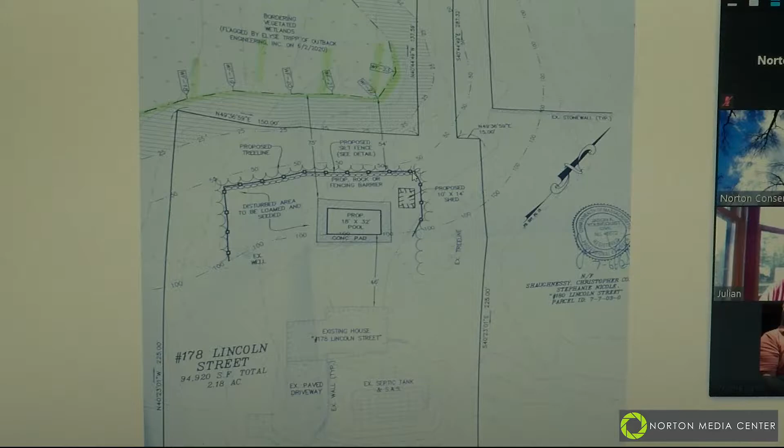A silt fence is proposed for erosion control during construction. And last but not least, there was one tree that the applicants had noted, and I'm sure they can add some more detail to that as well, that is outside of the scope of the tree line adjustment, but there's just some nervousness around it about the tree. It's not doing so well, so they're getting the approval from the commission as well to get rid of that one tree, but that can be worked with on the agent as well to help specify. If the Tarsas would like to add anything else, any notes, they're more than welcome to.

Yeah, so there's a tree just about to the northeast of where the current shed location is, that kind of leans into the loaming area, which would be potentially over the pool. Just like to kind of remove that just for future safety of the structure and of the pool.

All right, it looks like this is an already cleared area, is that correct? No, currently right now everything beyond the 100-foot line is all trees, shrubs, poison ivy. Fairly good sized trees? It varies from saplings to, you know, good size - there's one good sized oak tree that sits right on the 100-foot line. Okay, any questions from members of the commission?

I just had one question. So you're showing the pool about 46 feet from the house. I was just wondering why it was so far back, and wasn't any attempt made to take it out of the buffer.

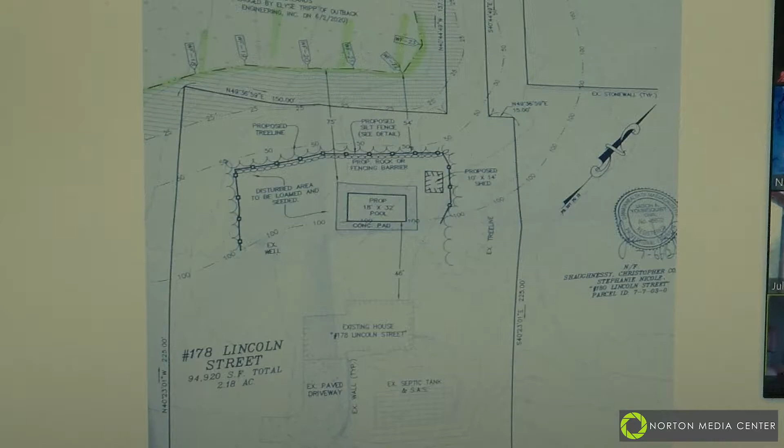I don't know if there are any members of the public that want to comment on this, unless there are other questions from the commission. I don't hear or see anybody unmuting. They have the capacity to unmute, is that correct, Jennifer? I think they've been unmuting themselves, so I think they can do that, yes.

Well, if there are no further questions, who is that? Oh, I'm unmuted. You're okay, Dan. Okay, but no question, Dan? No, the no-disturbance zone markers on trees, that would be my only question.

And it seems like that's been taken care of. I believe they're aware of that, and it shows a visual barrier on the plan. Okay, yep.

Any further questions? No, not for me. So it looks like pretty much all the information necessary is in, and we can consider a close, but I believe this is kind of provisional in that any questions can still come forth at the next meeting because of the difficult remote nature of this hearing.

Is that a fair statement, Jennifer? In the past, for most projects, you've continued for two weeks just to make sure someone from the public, if they had questions, would still be able to get those answered if they weren't able to access the Zoom meeting for some reason.

Whoa, hold it, this might work. Yes, I see a plan. All right, good.

At the last meeting, you were looking for a plan with grades on it. There was a plan from file 250719 where they have grades on the plan. I highlighted the 100-year floodplain so that you can see it. The old flagpole area right here was higher than the floodplain. Mr. Demmer's proposal is to remove the flagpole and the grading and install the fire pit, so it would still be outside of the floodplain.

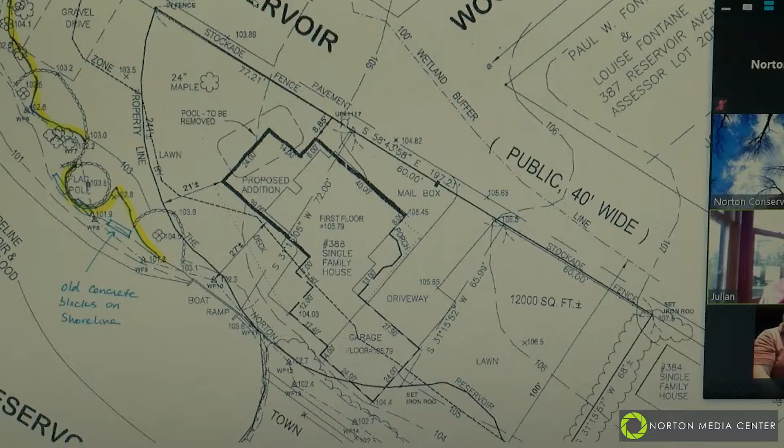Okay, I think that's all we wanted to know. Correct. All right, so do we need to continue in case there are additional questions, and then close it out on the next meeting? For this one, I don't think so, because you've already had 2 meetings on it, and we don't have any abutters or anybody who's called or asked any questions on it.

All right, so are there any questions from members of the commission? Nope. And any questions from members of the audience? No. I think Rick was going to say something, but it looks like we're about to approve it. Okay, I have nothing to say. All right, well, I think at this point we can consider a motion to close, and then we'll do a roll call vote. I'll make that motion to close the file for DET 1096.

Motion made by Lisa and seconded by Dan Pearson. So we'll do a roll call vote. Gene? Aye. Dan Doyle? Aye. Lisa? Aye. Dan Pearson? Aye. And I will throw in an aye as well. So motion carries.

So this is a request for determination, so it would just be issued. Is that correct, or are there some conditions? You need to make a vote that it's a negative-3. Ah yes, we're back in our regular meeting. So anybody want to offer a motion to make a negative-3? I'll make that motion.

Just 2 seconds. So we're again not seeing a plan. I was just using my arrow to describe all of the things that Craig... Yeah, well, it's not showing. We'll give you a little signal, Jennifer, so we don't interrupt. All right, now good now.

Okay, so this is the proposed design. The other portion of the resource area is the floodplain that is running along the bank of the reservoir.

So there's an existing single-family house with an existing detached garage, both of which are in very rough shape. We sought and have permission from the Zoning Board of Appeals to remove the existing buildings. We also plan to remove the existing pavement, which is close to the easterly property line, which would be within the 25-foot wetlands buffer area.

And this is what we're proposing to build in its place, the single-family house with an attached garage and the paved driveway in the front yard.

The existing yard right now has a chain link fence that was put in place whenever, 20, 30 years ago. It is inside the 25-foot buffer zone of the wetlands.

What we're proposing is the area that I have, and the rest of the property, I should say, is existing lawn with mature trees. Some of those trees will be very close to the existing and proposed building, which will come down, but the ones at the existing chain link fence, the large maple and another two large maple trees in the back, are slated to remain in place.

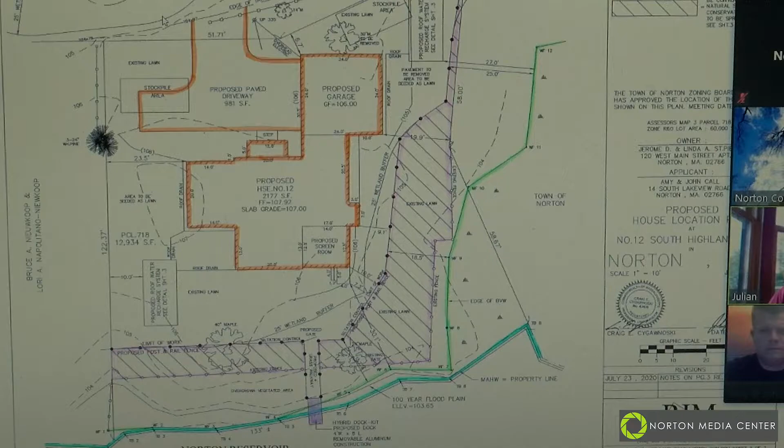Okay, thank you. Any further questions from members of the commission? Any questions from members of the audience? If not, this is something we can continue. Potentially all the information is here and we can consider an order of conditions next time, but it will offer the opportunity for additional input.

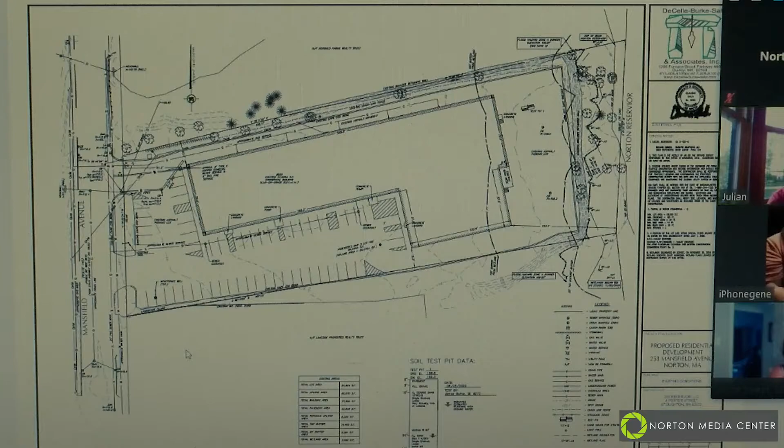So we had Ecotec come out and flag the wetlands along the Norton Reservoir to the east. You have BVW, you certainly have 100-year floodplain as well, as generated by the Norton Reservoir elevation, and that's shown on the plan. We generated the plan by field survey, instrument survey from our office, stamped by also one of the owners of the company.

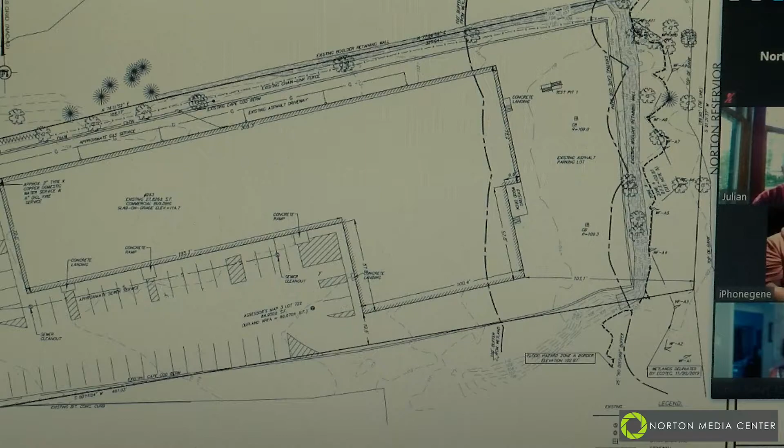Majority of the site is impervious. You've got probably 10,000 square feet of impervious in the 100-foot buffer. What we're proposing to do is revamp this whole development and redo the entire stormwater and actually meet all the standards of the stormwater management standards, as well as we're striving to work within that 25-foot no-disturb as well. As you can see, some of it's already paved and disturbed in the back there.

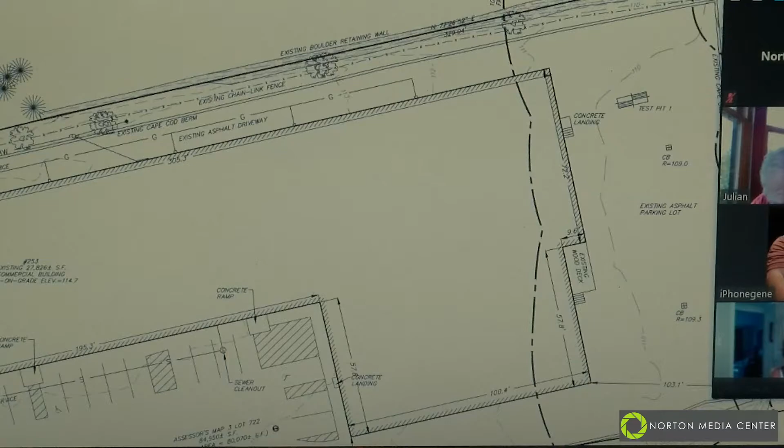You have a heavy stone retaining wall that supports the parking lot in the back, and the drainage in the back there is dated. I'm not going to say it doesn't work, but it's an old system - maintained, yeah, I would say that's a good word for it. But what this site needs is an assist in getting it back up to current standards, and that's what we're looking to do.

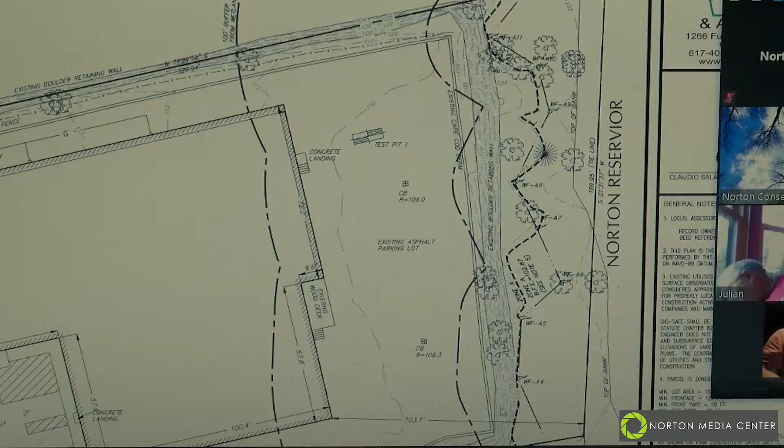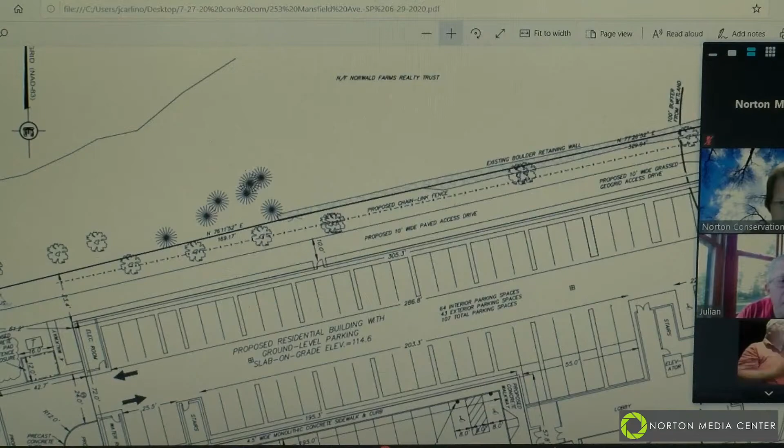If we can go maybe to the 2 sheets down - sheet 4? Yep. So what we're proposing is really to keep them within the building footprint. The original proposal is to use the existing building footprint and put, I think there's 74 spaces underground, might be 64 in the garage - yeah, 64 interior.

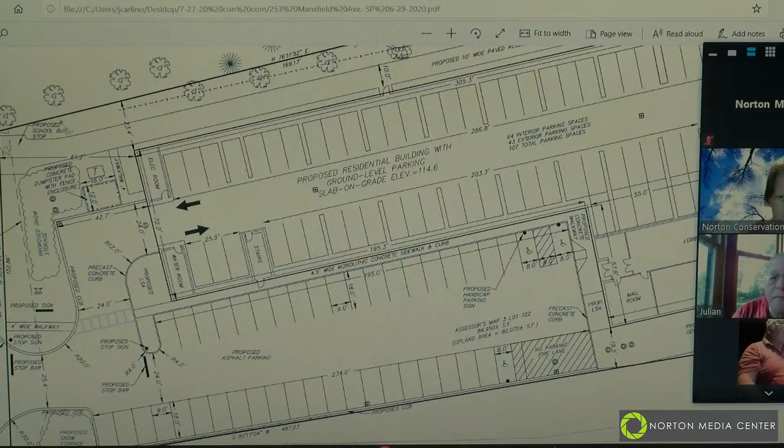But like I say, as far as the conservation issues go, we're taking out that entire parking lot and putting in kind of a passive recreation area, lawn, as well as a recharge system for the roof. And we'll be providing surface runoff drainage for the parking lot to the south of the building, that'll be collected through a water quality unit and discharged to Norton Reservoir. The suspended solids will be certainly meeting the 80%.

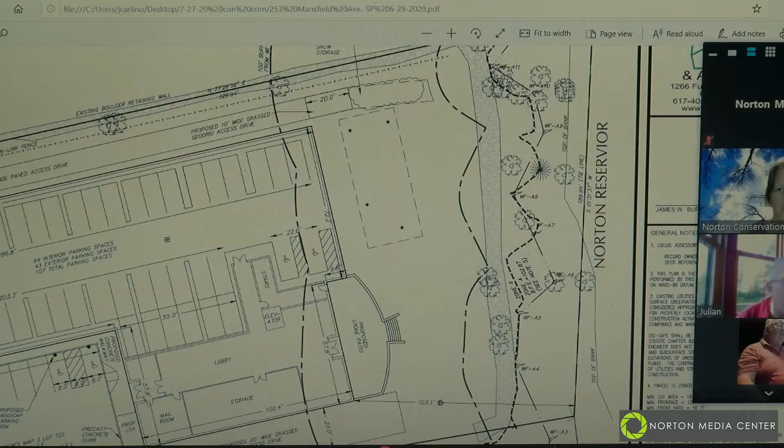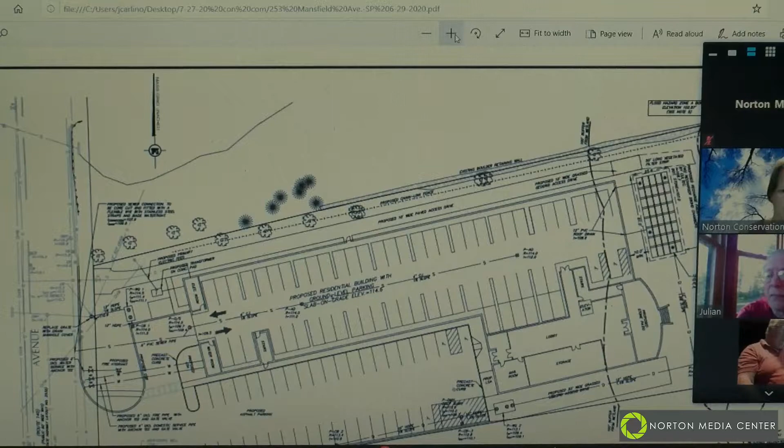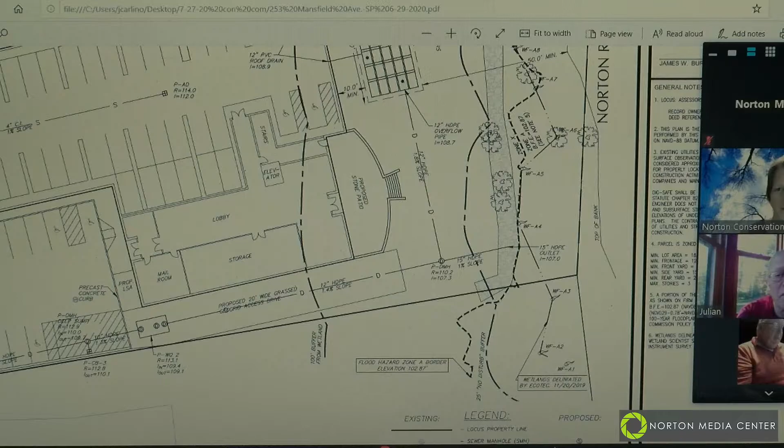We'll be meeting recharge requirements, and what we're using is, I believe, 40 Cultec units, the 280s, which is the 2-foot depth ones. We did a perc test, soil test, and found not what I expected, to tell you the truth - it was sugar sand. We were able to increase the infiltration rate to an A soil, and it really helped me. The depth of groundwater was also down to about 90 inches, and really apparent and certainly associated with the level of the Norton Reservoir.

As far as all the other improvements that aren't related to conservation, there's going to be new fire protection, new water service, new sewer, and a new parking lot on the surface as well.

See, what else can I tell you guys about? Jim, maybe describe the geogrid access and the point source discharge?

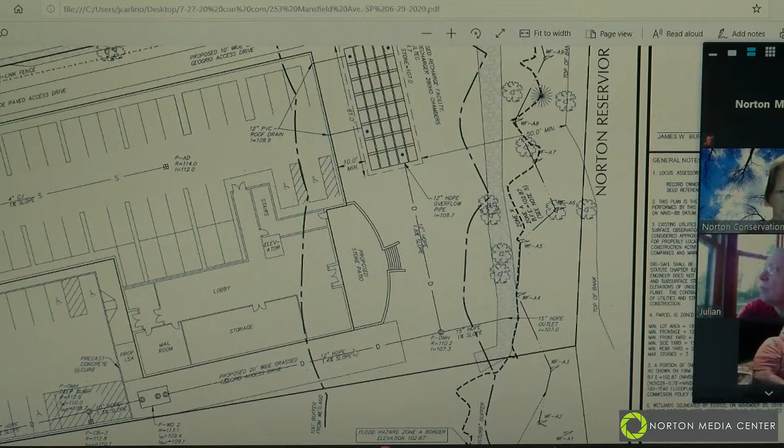The fire department requested access around the building, so in the northeast of the lot, there's a geogrid access, maybe 10 feet wide by 20 feet long into the back, and also on the south side a longer geogrid access along the rear to support emergency vehicles. We're also proposing a point discharge.

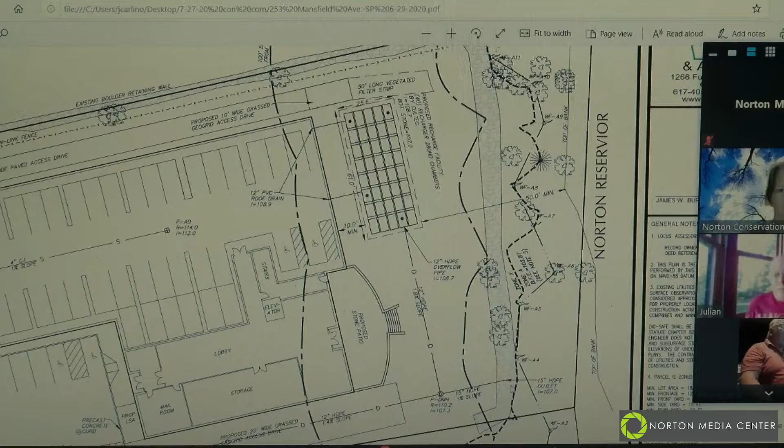I think having a point discharge, as opposed to creating a weir over the wall, to control that style of runoff we might have to extend into that 25-foot buffer a bit more extensively for an energy-reducing riprap style apron. I think the point discharge is a little less obtrusive and actually a lot more controllable with regards to environmental impacts. That's just my opinion, and if you guys think differently, we can certainly work with you on that.

I think the big item here is the reduction in impervious area - 11,384 square feet of reduction, and most of it is in the back. Like I said earlier, there's 10,000 square feet of impervious reduction right along the Norton Reservoir.

Conservationally, I think this is a great project. The ZBA may think differently, but conservationally, I think this is a win for you guys. If you have any questions, I'd be glad to answer them.

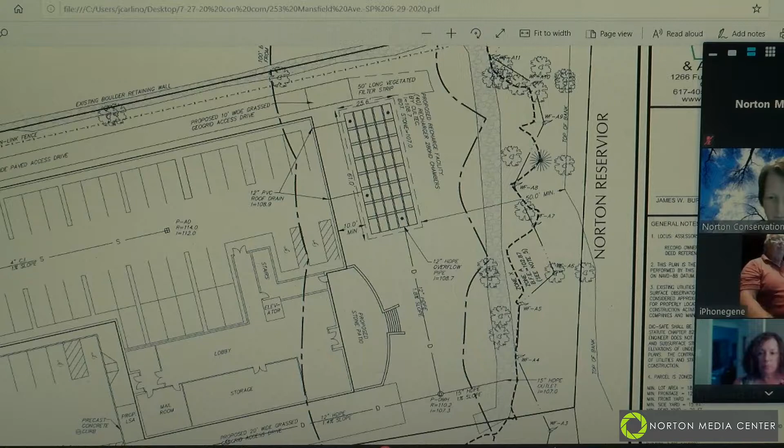Can we back up for a second? It's really hard to tell the difference between the subsurface parking and the at-grade parking. The building is a heavier line, and you can see the double arrows going back in on the west side of the parcel, kind of centrally located. Okay, so that's the building and the subsurface parking, and then the at-grade parking is to the... I don't know what they're calling it, but all the parking is at grade.

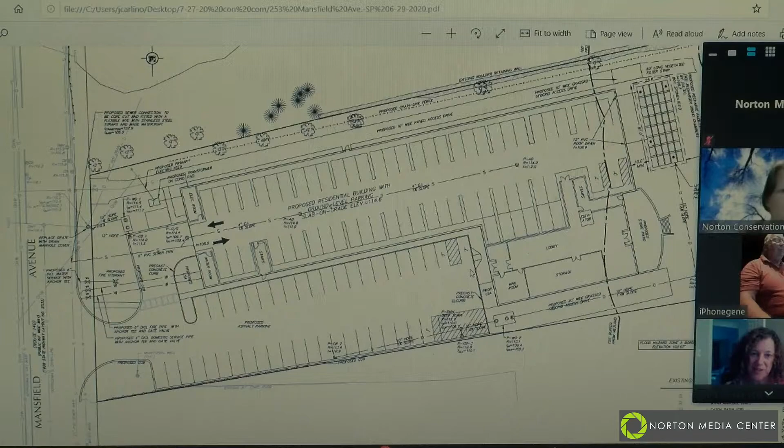It's just some of it's in the garage and some of it's not, so it's all at grade, not subsurface per se. The surface parking is basically on the inside of the L, on the southerly side, near the main driveway entrance out into the street.

So is that parking lot subsurface parking - a garage beneath the building? The garage is at grade, and there's going to be a floor, with the building on top of that. So it's one level of parking and then three levels of residential, with the buildings on top of the at-grade parking. The lot to the south is just at-grade parking, no building - it's almost the exact same building footprint and layout that's out there now.

So where does the discharge from the stormwater from the parking that's below the building go - does that go to the sewer? Yes, it does. And then the at-grade parking is treated and discharged down the right-hand side there. Correct.

Do you have provisions for snow storage and snow plowing, because what I'm seeing is this parking lot goes right into and ends at the building? We do have snow storage - I believe it's on the layout plan, the third or fourth sheet - located in the large islands in the front, and a little bit towards the back as well.

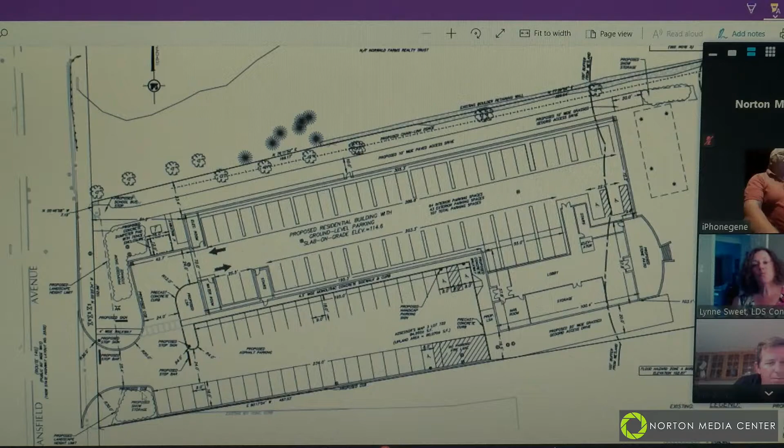Yeah, it's not even a question of storage. I mean, you can't plow that out of the way because you're heading right into a building. So it's a little difficult. Okay, but that's for you to figure out. But just as an aside, there actually is less parking on the outside of the building under the new proposal than what there is today. Yeah, I'm just talking about what you're constructing though. I don't really care what's out there today.

So let's move on to the open space. You have 60 units and the only open space is to the rear. How big is that? About 9,000 square feet from the top of the retaining wall to the rear of the building. Okay. So I assume that's where you're going to focus some landscaping features because you're going to have 60 units. That's how many bedrooms? I think it's approximately about 150 bedrooms. I can get you that exact answer. But there is also indoor recreational space as well as the outdoor space.

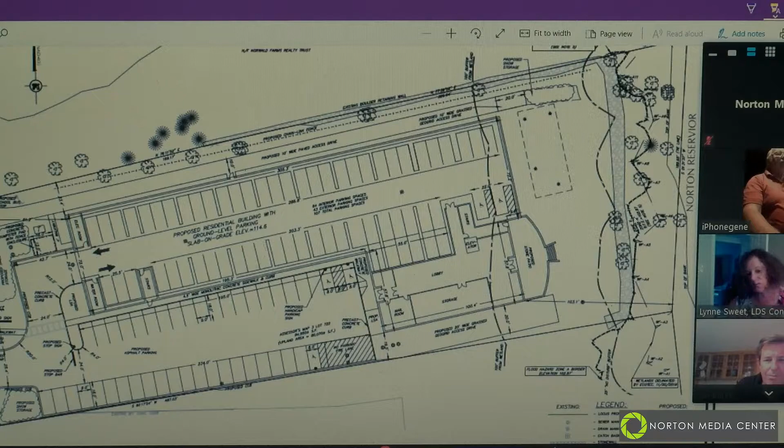Right, so potentially 150 people have to use that open space in the back. That's 9,000 square feet, so I assume you're going to have some type of landscaping plan. So we'll be interested in seeing that.

And so, did we want to go over the waivers for the stormwater bylaw? Sure, I mean, okay. I guess from my perspective, I'm unprepared to discuss that. I was really concentrating on meeting the 10 standards from Mass DEP's standards. Oh, okay. Well, we can do that at the next meeting then.

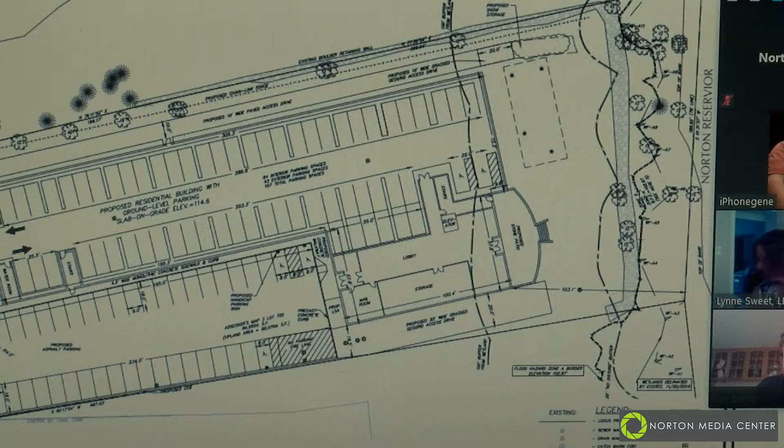But you're going to zoning board on Wednesday? That's correct. Okay, so you haven't met with them yet to ask them for the waivers, and then you'll itemize which ones you're asking for, and then we can have a copy of that, and we can look at that for the next meeting. Sounds good. Okay, thank you.

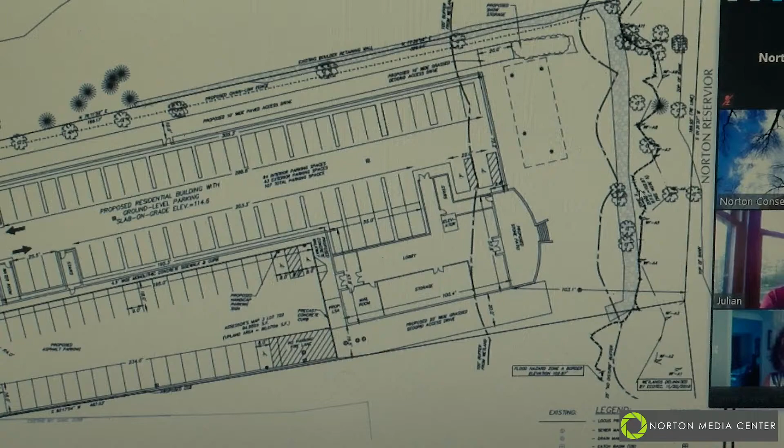All right, do we have other questions from members of the commission? Nope. And I don't know if any members of the audience want to ask a question or make a comment at this time. There is a feature to raise your hand, if you see that on your screen. If you click on the participants tab, then at the bottom it has a raise hand.

Right, so I don't see hands going up at this point. So we can consider, unless hands go up shortly, a motion for the continuation of this hearing, and it is August 10th, I think, is our next meeting. You think August 10th would work for you? Certainly, I think, depending on what the ZBA requests, if August 10th moves into something we have to, I can certainly contact your office.

So I would just ask the question if we should postpone to a meeting a little later than that so we can get the peer review together with the zoning board at the same time. And then at least have the peer review started so that we can have more discussion on the actual stormwater.

That seems reasonable to me. All right, so our next meeting after August 10th is August 24th. Do you think that would be a reasonable time? I can go ahead and put it into September, only because I think the peer review, if we haven't even selected somebody yet, the engineer's going to want at least a couple of weeks. So I think maybe the first meeting in September would be better, and that is September 14th.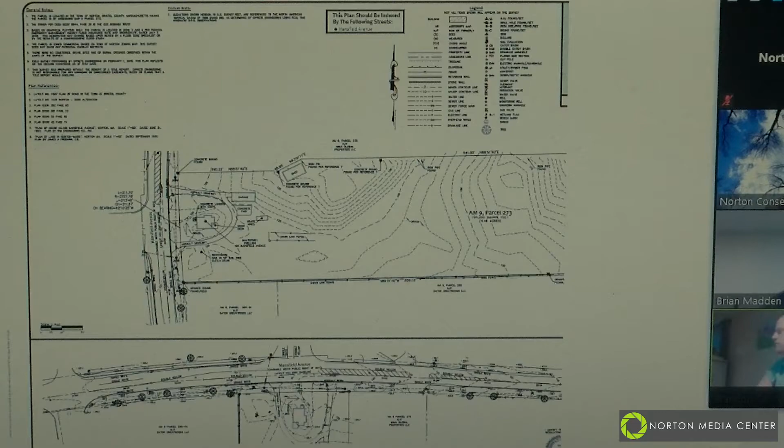So if you want to flip to the next page, this will be actually 2 pages, and the existing conditions page, sheet 4. So this is the existing survey of the site.

You can see Mansfield Ave across on the left side of the plan there. Norton Reservoir is just off the site to the right side. You can see that there's a house, driveway, and some garages and sheds up closer to Mansfield Avenue on the left side there. And then the site's topo is basically high on the Mansfield Ave side and high on the north side. You can see up near the shed, about a third of the way back, there's a little high spot. Then the site begins to drop off towards the reservoir.

Then that line that crosses right where Jennifer's cursor is now, that's the edge of the wetland that we had come before you previously to nail down. That's what we're measuring all the buffers off of. The front of the site is open, just residential yards, but the majority of the site is treed. The center has some clearing, and down to the water there are some paths that narrow up and then areas open up, but the majority of it is treed.

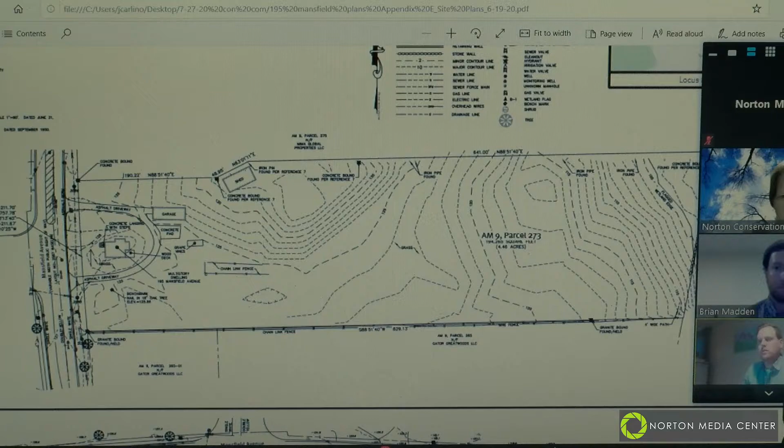If you want to go to the next page, Jennifer. This is just the erosion control plan, which I can get into if there's any questions. But this is the site layout plan.

As you can see, we're proposing one building. It's 100 units, 4 stories. Can you zoom in, Jen, please? Right now we're at 179 parking spaces. We were before the ZBA last week. We had our first meeting with the ZBA last Wednesday night.

And we discussed the possibility of reducing some parking. So the applicant for the project owns about 9,000 units across the country. They've done several projects in Rhode Island, Massachusetts, and Connecticut recently. They usually look at 1.65 to 1.75 spaces per unit. Right now we're at 1.8 spaces per unit. So there is the opportunity to probably get rid of some parking in that rear lot, kind of shorten it up. That'll bring things even further away from the reservoir.

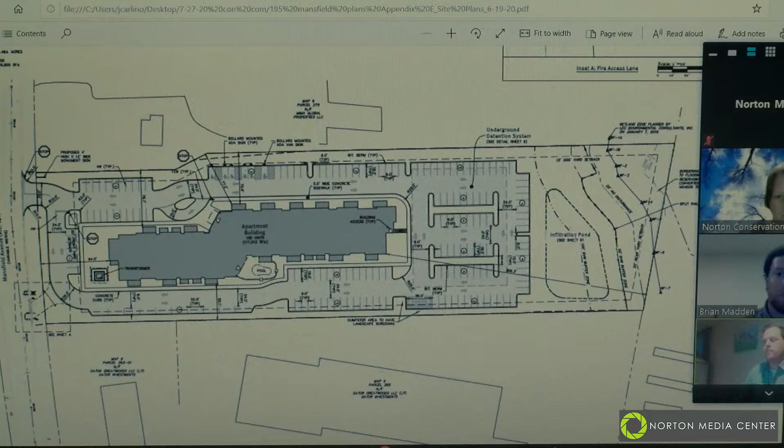You can see on the right side that dashed outline labeled Infiltration Pond. The line that goes through that pond is the 100-foot buffer. So you can see that, as Brian was saying, all the impervious area on site is located outside the 100-foot buffer. The foot of the outside slope of the basin is roughly right at the 50-foot buffer. And the only clearing past the 50-foot buffer is up at the top, where our stormwater outlet is, but we are respecting the 25-foot no disturbance zone. And I should note that the stormwater design meets all the requirements of Mass DEP, the Norton Town regulations, and the wetland bylaw. We're not asking for any waivers from any of the Conservation Commission bylaws or regulations.

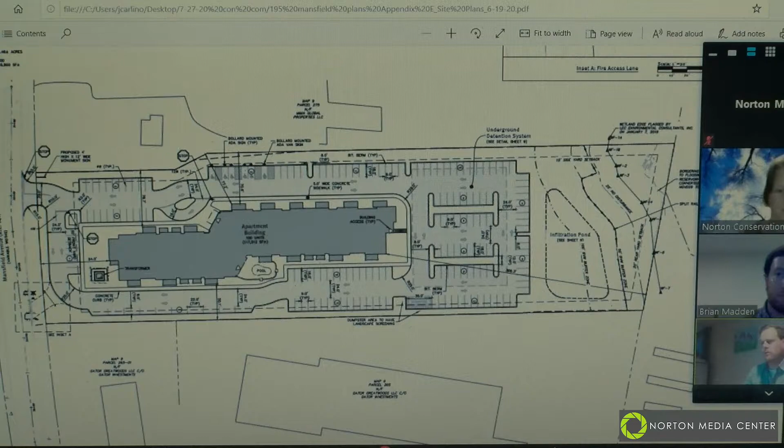Thank you. If you want to go to the next page, it'll show, I think it's the next page. If you go one more, Jennifer.

Just to run through the stormwater design for the site, like I said, it meets all the stormwater standards. Basically, the treatment chain is a collection system of catch basins routed through a downstream defender to provide some water quality treatment. Then that basin in the rear is designed as an infiltration basin. I just watched the previous application, and I wish we had their sand and low groundwater table on this site, but ours is more of a loamy sand, so we're kind of limited on our infiltration rate. So that basin is sized to provide the required recharge.

We exceed the recharge requirement by about 30%, I believe, and also match or decrease all the peak runoff from the site. That basin is sized to recharge the smaller storms, and then there's a larger underground detention system under that rear parking lot, right now designed as a pipe system. The first flush of storms will go through that water quality treatment device into the infiltration basin. When that infiltration basin begins to fill up, in some of the larger storms, it'll back up into the underground system before it discharges over the berm towards the wetlands. So that'll provide the peak detention on the site, and then it'll be metered out within 72 hours. Like I said, we meet all the pre-development flows, which, being a wooded site, are pretty low. So we are detaining a good amount of water on site and recharging a fair amount of it.

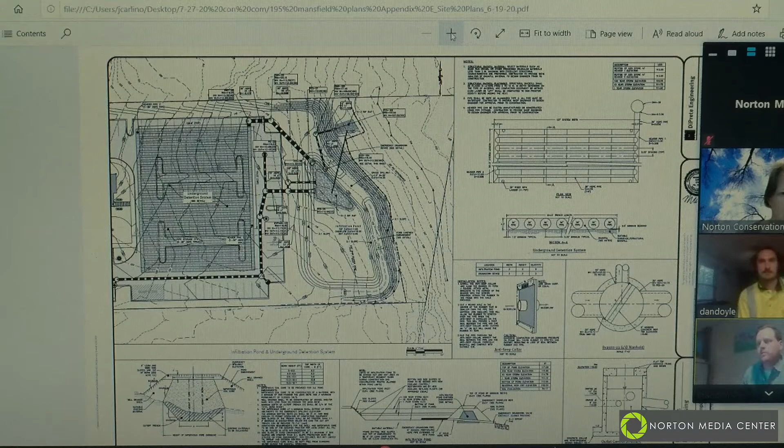Jennifer, can you zoom into that basin? If you go to sheet 9, that sheet actually just shows the basin, so you can see it better since it doesn't let me zoom in anymore.

I was just looking for the access berm, but I can see it now. Yep, so we've provided access, and we're looking at reducing the parking even more. We'll probably be proposing to leave the basin where it is, but provide more green space between the parking lot and the basin for maybe some amenities and recreation space.

We also have some areas around—I know the previous application was asked about snow storage. There's a fair amount of shoulder up in the front of the site and also around the buildings on the exterior, not adjacent on the interior island of the building, but there are some areas. In the back, top left and top right of the basin, we would propose snow storage that would then melt to go into the stormwater treatment system and be treated.

Jennifer, can you zoom in any more? I'm still—I can only zoom in once. That's it, it doesn't do anything more.

So is the limit of sediment control there at the toe of that slope? Yes. Okay, that has to move because there's no way you'll be able to build that slope against that sediment control line. Is that a fill slope, I assume? That is the fill slope, correct? Yeah, well, you can't get equipment back there if they're gonna build it from that side.

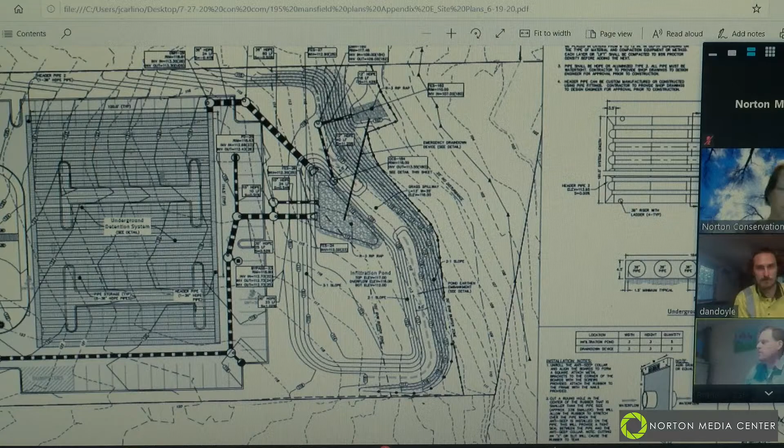Brendan, I did have one question for you. Were you just thinking about putting the snow storage there, or is that on the plan? Putting the snow storage in the front? We don't have it labeled on the plan, but I can definitely get that added. There's a fair amount of pockets up in the front of the site that could handle snow too, graded on the shoulder to direct the runoff back into the site.

But if you look on the left side, about a third of the way back where there's that kink in the property line, there's a fair amount of area there.

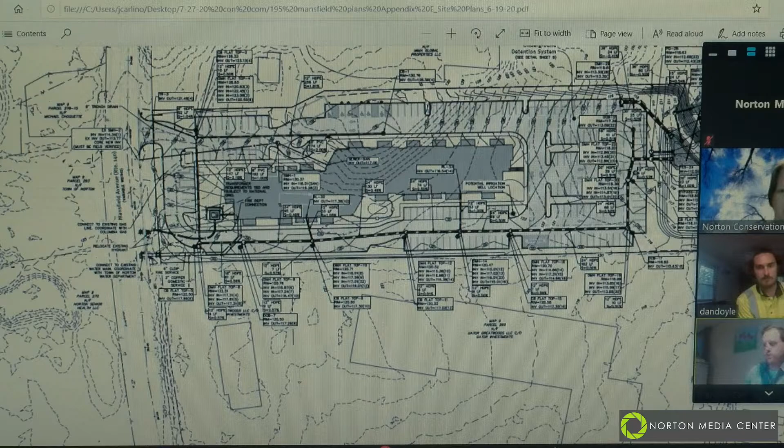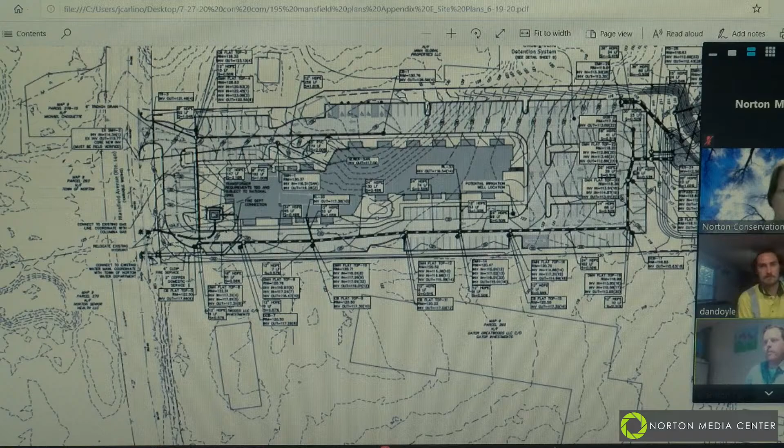The previous developer said it as well—a lot of the commercial real estate, which this is managed by AR Builders. They own and operate all their inventory that they permit. I think if Jason Kimbitsis with AR Builders was on tonight, he'd mention they've been in operation for 30 years and have only sold a couple hundred units. So they're the people that will maintain and operate the site, and they're well versed in handling snow. They're based out of Pittsburgh and have a lot of sites up towards the Chicago area. They typically put a sign at each place they store the snow, just in case they get a new plow driver, so they don't put it in a completely different place.

We'll detail it out more on the plans. We can also add it to the operation and maintenance plan for the site. There's a section on snow storage in there, so we can add specifics, and there's some imagery in there that we can add and make sure that's carried through.

If we're asking questions now, we might also ask about LID. Are you using any low impact development? Are you addressing in the plan any low impact development?

Currently, we have asked for a reduction in the parking. That's limiting impervious areas, which is one aspect. We're trying to eliminate about 30 parking spaces, probably where we'll end up when we get through this. We have started looking at some more opportunities to add some LID elements to that design. But keeping things out of the buffer, reducing the impervious area on site, and providing the required treatment is kind of where we're at now. We can look at other measures we can employ on site.

So it doesn't look like there's any opportunity to even plant a tree. Is there a landscaping plan to prevent thermal impacts? We did a landscape plan. It's on the last sheet, I believe it's sheet 12, Jennifer.

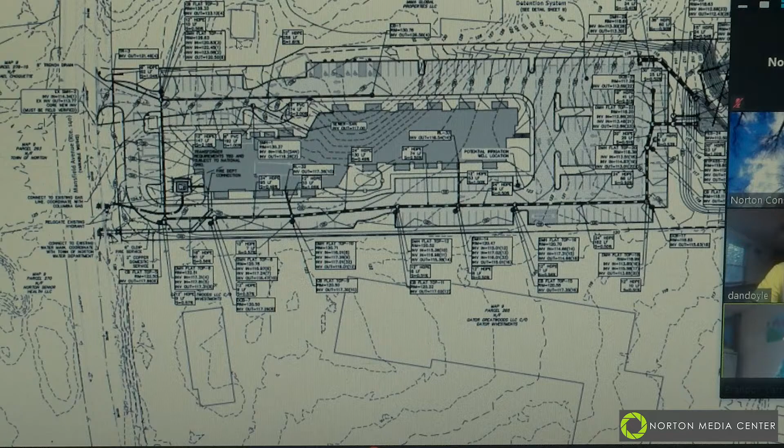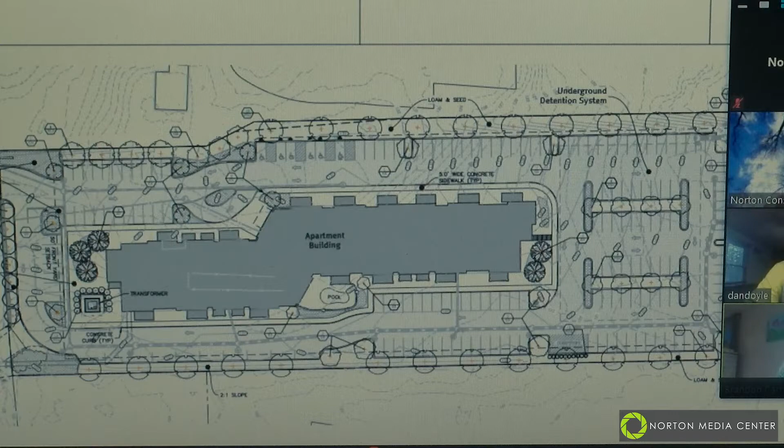Let me just check, but I believe the only landscaping waiver from the town regulations we're asking for is a reduction in the landscape buffer width along Mansfield Avenue for the zoning regulations. For tree coverage and spacing of trees and proposed vegetation, we are meeting all the town standards. As Brian spoke about, I don't know if he's able to talk, but he did specify certain seed mixes for the basin slopes and bottom of the basin that we've included on this plan.

So you don't anticipate any paths down to the reservoir because you don't own it? It's pretty, we've actually been addressing that with the abutter to the north, the heating oil company, and they actually attended the ZBA. I don't know if their representative is here tonight, but they requested that we place some sort of barrier to keep people off of their site, so we've proposed a split rail fence.

At the rear of the site, we're also looking at proposing kind of a solid fence along the northern property line. Basically, we're trying to keep our residents inboard of our stormwater system and not promote access down to the Norton Reservoir, because our site does not have direct access to the reservoir.

So to get there, you have to cross one of the abutters. We're having that conversation with the abutter to the north, and we're looking at a way to sign it - we don't want to put solid fences adjacent to the reservoir, but other ways to kind of keep our people on our site.

And it is a managed site. There are rules and regulations that are part of the leasing agreement, so it's something that could be addressed in there too.

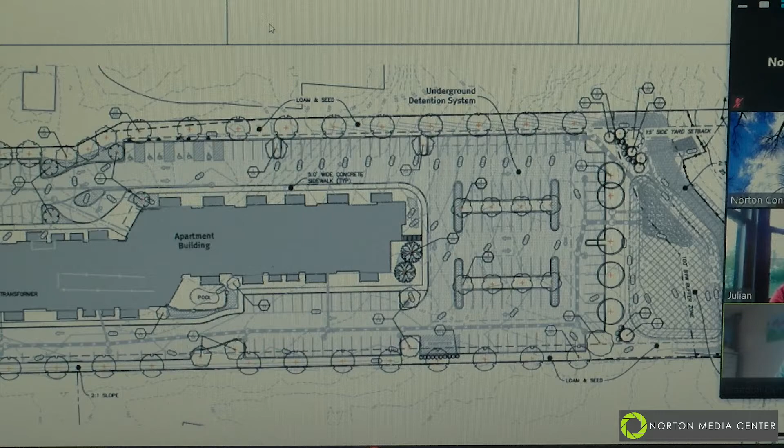All right, any further questions for members of the commission? And we can consider questions from members of the audience. I'm looking for hands on the participant list. Right now, I don't see any. Now, this...

This project will need to have a consultant involved. Is that correct? Yes, stormwater, yes. So maybe we'll just mention again, at the bottom of your screen under participants, that's where the blue raise-your-hand icon is. So if you have a question, please use that so we can see. And if you're not able to find that, you can unmute yourself and ask your question now.

All right, the next step, this obviously needs to be continued, and the applicants should consider how soon you want it back on the agenda.

Our choices are August 10th, and then the second meeting in August is August 24th, and then it steps into September with the 14th and the 28th being our meetings. So do you have a preference as to how soon you want this back on the agenda for further discussion?

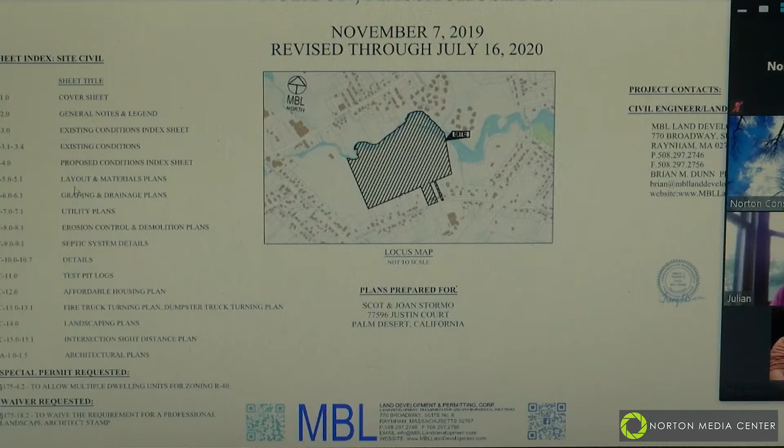Okay, ah, there we go. Yeah, because I thought we asked them to. It's gonna take a minute to find the right page. Let me see if I can narrow this down. Probably the grading and drainage. Drainage, one of those. All right, so 6. 6, or maybe 7. It just takes a minute to load because it's a real 39 sheets.

But there's not anything specific on there, so I guess it would be easier if we just said, nope. Yeah, this is still the existing plan. But does the existing conditions plan show a path? Because then we can just reference that. I just don't know. I don't think I have that set with me.

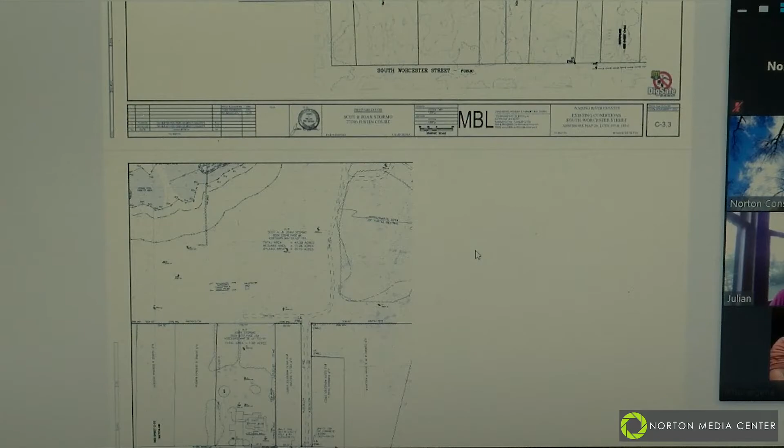So this path here. Oh, I can't see it. Better? Can you zoom in? That's as far as I can zoom in. All right, so can you show us with your cursor where the path is? Oh, okay. And then it goes out back, even further. Okay, and obviously that's going to be maintained, right?

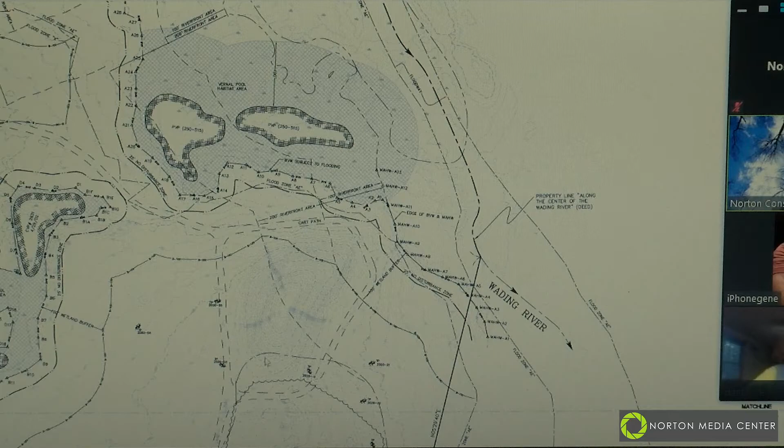I'm not doing anything in that area. They're not proposing to do anything except for the detention basin, infiltration basin, I think, over here now. Okay, yep. So I think if we can reference that on the plan that says they shall use the existing old cart paths or walking paths as shown on the existing conditions plan.

What are you doing, buddy? Huh, what are you doing? Is that your dog? Oh yeah, that's Otis. Keyboard. Okay, that's fine.

I've got 61 then. Any other comments? 67, so the turtle nesting habitat again. Yes, contained as described in attachment B. What's attachment B? It's actually the plan set, so we can change attachment B to 'in the plan set.' Okay. Yeah, then the only other one was 'in perpetuity.'

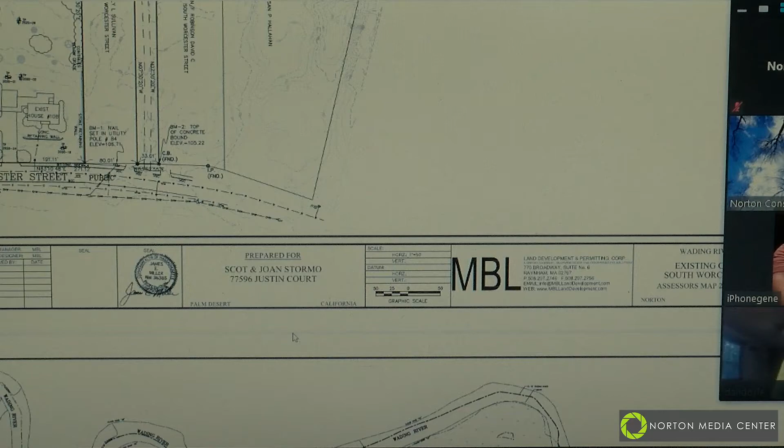Do we have anything tied to the turtle nesting habitat plan in perpetuity, or the vernal pool? It's within 60, yeah, it's there. Okay, 69 to 70, this as well? Yeah, okay. Good.

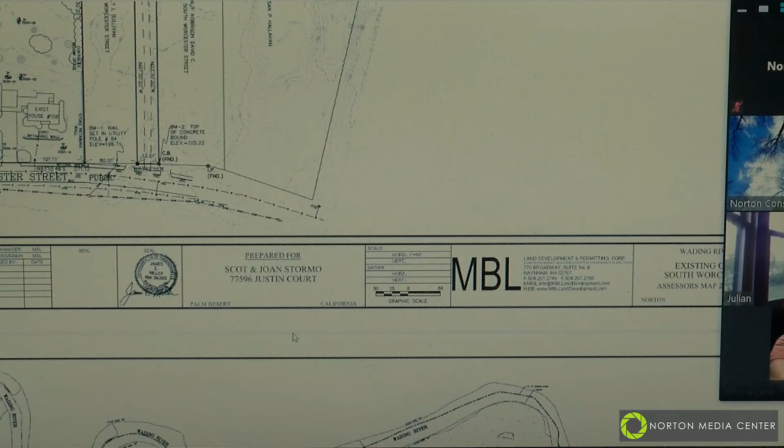All right, we can consider a motion to approve the order of conditions for 250-1052 as amended. I'll make that motion. Motion made by Lisa and seconded by Dan Doyle. So we'll do a roll call vote. Gene? Aye. Dan Doyle? Aye. Lisa? Aye. Dan Pearson? Aye. And I'll throw in an aye, so the order of conditions as modified is approved.

Our next item is a request for a full certificate of compliance for determination 446, for J. Greg D. Girolamo and Dorothea Wander of 109 East Main Street. So this is... oh I see, hazard trees. So that's all set then? Correct. Suitable for a motion? Okay, yep.

I'll make a motion to issue a full certificate of compliance for file number DET 446. Lisa makes a motion and seconded by? Second, Dan Doyle. Roll call vote. Gene? Aye. Dan Doyle? Aye. Lisa? Aye. Dan Pearson? Aye. And I'll throw in an aye as well. So motion carries.